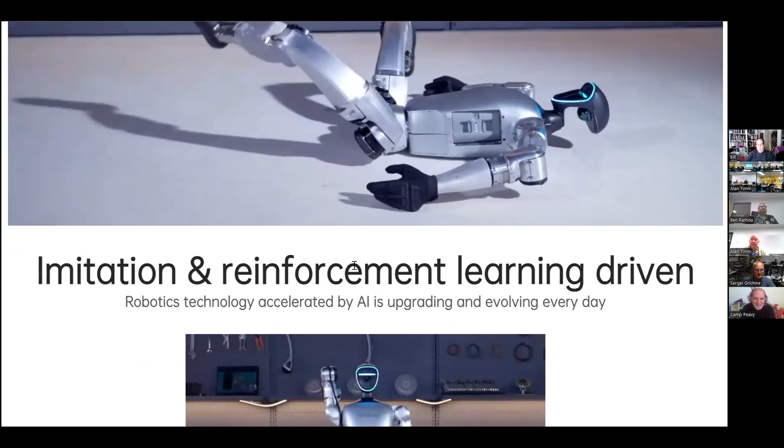So they did release in their video how it stands up. They couldn't copy the Boston Dynamics one exactly, but I'm almost certain it could get up in the same way.

As we scroll down, I just see that in the chat it says you need a humanoid to walk the dogs. They sell them as a pair.

How do you program it to do tasks? Like, what if you wanted it to clean the shower? Right, so that's the thing — the cheap $16,000 ones are probably going to be radio controlled. It can't do that, so it's not capable of general tasks.

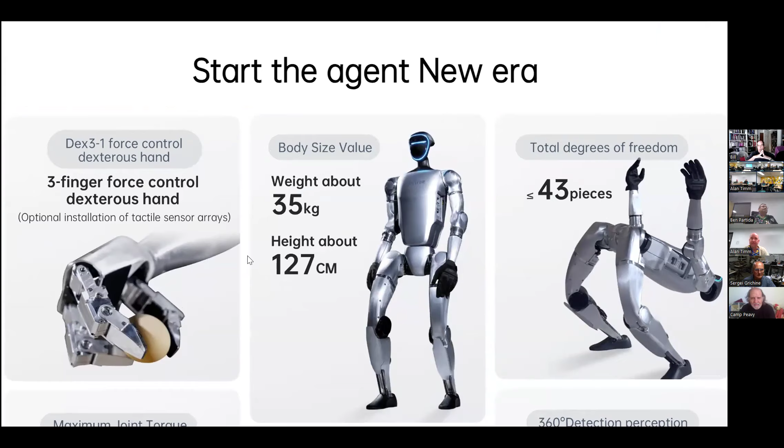And the breakthroughs required for more general tasks are still being made. We've seen hints of it with other humanoid robot videos, and that's exactly why there's 12 companies now spending tens of millions, hundreds of millions of dollars developing the hardware platform, because they believe the software is going to catch up. But that'll take time, as Chris Albertson likes to say — the software is the hard part, the hardware is the easier part.

Yeah, so they've got some video clips. They control the baton.

What is impressive about this isn't that it's twirling a baton by itself, but it gives you a little glimpse into what it takes to do this without falling over. Up until the reinforcement learning and Isaac Gym stuff, they would generally code an MPC controller just for the legs for locomotion, and then a separate controller for the arms.

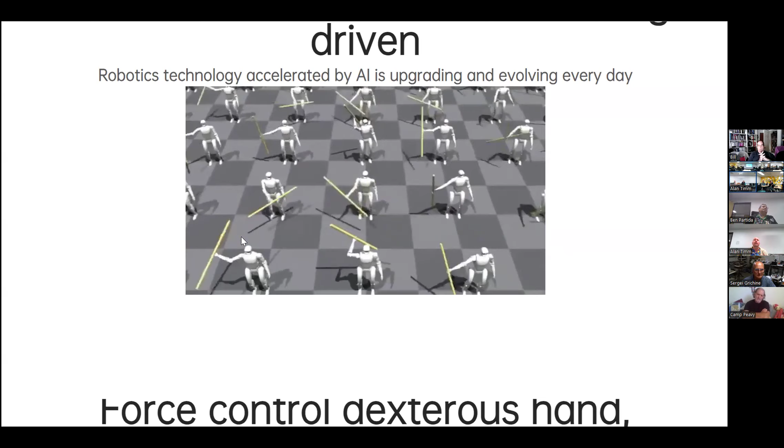Full body robot control, we knew was the next step. They knew it was the next step, but they didn't have a solution yet. So what you're seeing is not only that it can swing this baton around, but it is incorporating the full body dynamics that keeps it upright and keeps it in the same position. So there's a lot hidden in some of these videos.

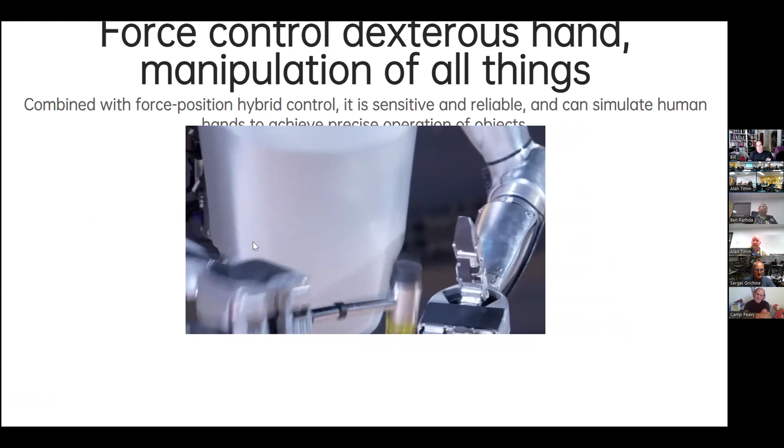So they have a quick demo, it's not even going to show you the full thing, of crushing nuts. I do not want it. That is not a task that I think is very...

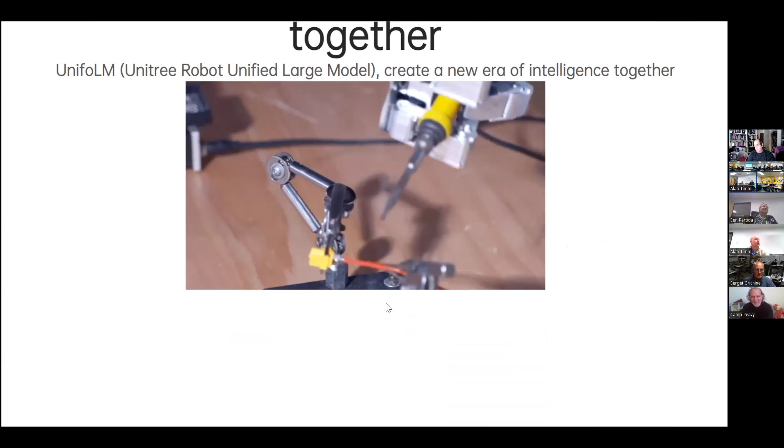Just like an engineer. And so here's what ticked me off about it: the $16,000 version of the robot has mannequin hands with gloves on it. The wrists rotate at the top, but there's no grippers. And I'm like, man, if I'm gonna dump 16 grand into a robot, I want fingers that work.

That started my every waking moment, after working on the weekend, task of recreating the hands that are 3D printable so that when I can buy this unaffordable robot, I can slap on my hand design and it'll work. So the last half of my talk, I'm going to show you some tricks and things that I did for those, and so far everything looks great. So that's where my adventure started - I wanted hands, and I didn't want to spend what we thought was maybe $40,000.

Switching over to the price sheet - certain qualified buyers were sent a pricing sheet for the robot. The information on the first tab is the same thing we saw on the website: 1 degree of freedom waist, 1 degree of freedom wrist up at the top of the forearm, no moving fingers. They call it a high performance 8-core CPU. It has to be using the same system module as in the Go2 - it's a Rockchip 3588P, or maybe it's an S - 8 gigs of RAM, 32 gigs of flash.

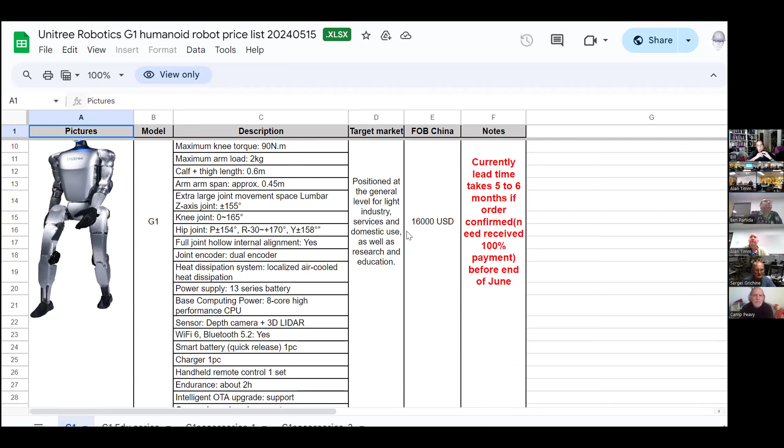The pricing list suggests that at time of ordering, you can mix and match the different features. It looks to me it would be possible to order, let's just say, the base model with the 2 degree of freedom wrist. That being said, the base model controller may or may not be able to control it. But once they're ordered, I don't think there's a way to upgrade the wrists or the waist to anything more.

But 10-year-old me, $16,000 robot, you don't need to eat.

So about the time they released it, they actually updated their GitHub site with the URDF and MuJoCo models of the G1, so this can be brought into Omniverse or the standard simulator, which name escapes me because I don't use it anymore - Gazebo.

This also put Mujoco on my radar. Mujoco, what are you using for a simulator these days, Alan?

So I am a big fan of Omniverse. The hardware requirements are a little bit higher, but I absolutely love it. It's a dream to work with. That's NVIDIA, right? And the environment is everything that Gazebo isn't. You can edit the robots through the UI, you don't have to edit a text file. And that's one of my biggest gripes about URDF and Gazebo is that they never made a GUI for editing.

and creating URDF robots. You always have to do them somewhere else or write them by hand. Omniverse, you can import from several different sources, articulate. But the one that Unitree uses, you're calling that URDF? Sorry, I'm getting too excited, I'm talking too fast, I'm catching up with your lingo there. I like it. Omniverse Isaac Sim is amazing to work with if you've got an RTX graphics card that supports it. The Unitree guys, and I could have sworn they were on stage with the NVIDIA presentation for Groot and NVIDIA Omniverse and Isaac Sim, but maybe they weren't.

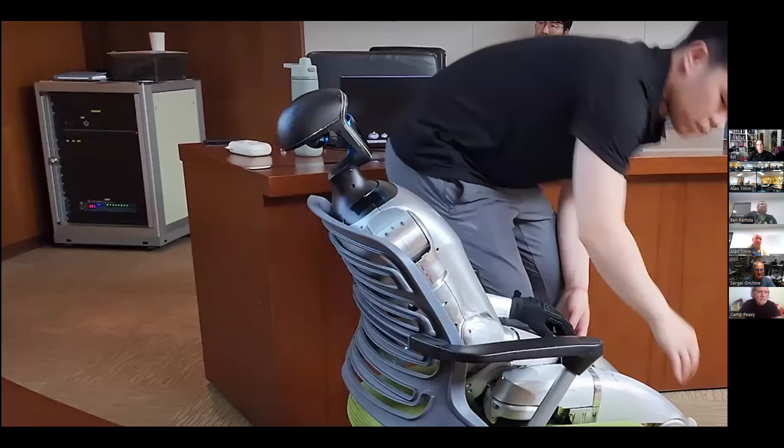No, we will not do that. I do not want that. I want this. There we go.

There's a company in Korea, a reseller, who has a prototype unit available that they're demoing to their board members. And so while this is running in the background, I wanted to talk about this robot and humanoid robots practically over the next 6 months to 2 years.

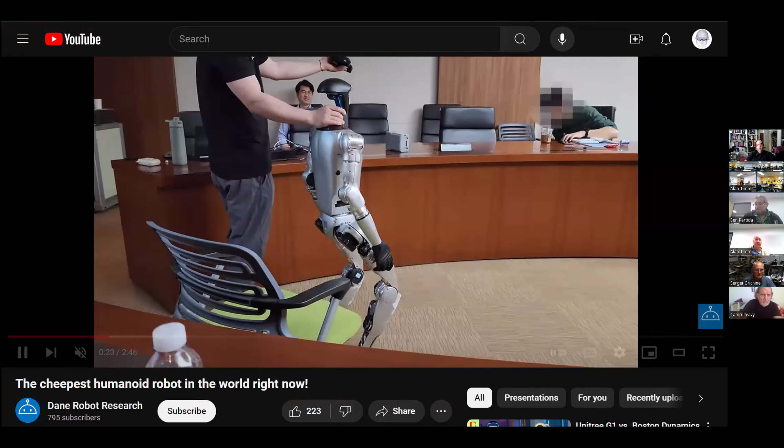One of the first things I wanted to talk about is let's table for the moment the fact that the software breakthroughs required for this to be truly multi-step learning aren't here yet, but are en route. So let's just assume the software is available. Okay, it's a stretch, I know, but I want to focus on the hardware. So you have force feedback, you have load feedback on each of the joints, 2-hour runtime.

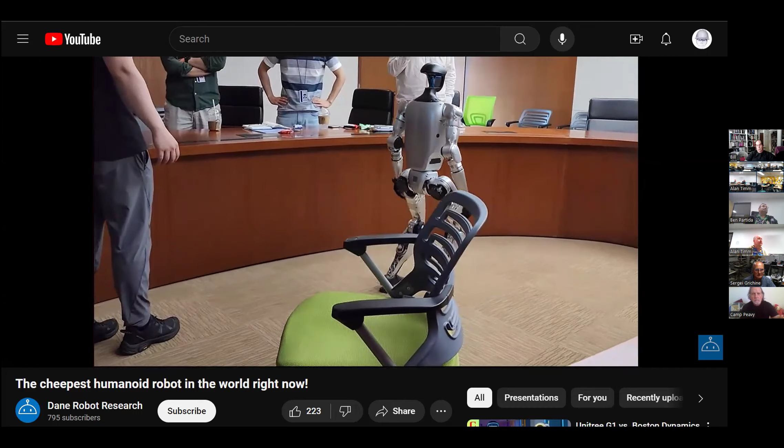One of the first things I want to talk about with you is, and you'll see this when you get up close and personal with my Go 2, is there are little scratches and discolorations all over it. It's hard plastic, it's metal, it's been operating in my house. And even with a skilled human pilot and the fact that it has obstacle avoidance and a LiDAR, it bumps into stuff. And when it bumps into stuff, it scratches itself, it scratches the other stuff, it scratches the walls. And at least with the quadruped, if something fails, it'll just drop down. If a humanoid robot fails, aside from the 'go crazy and grab a knife' type scenarios, it's just going to drop.

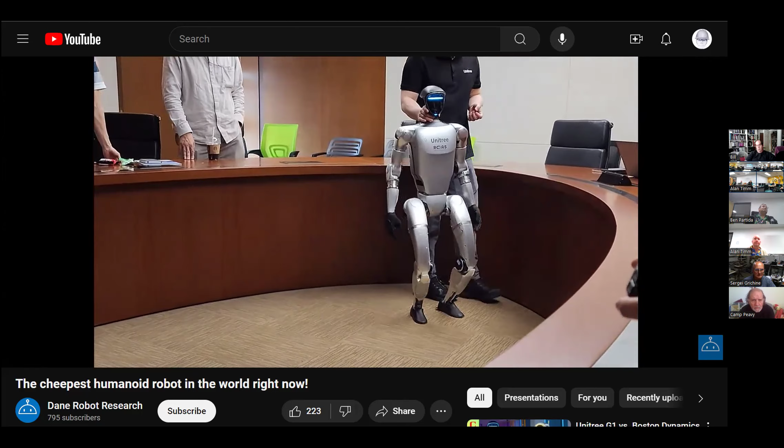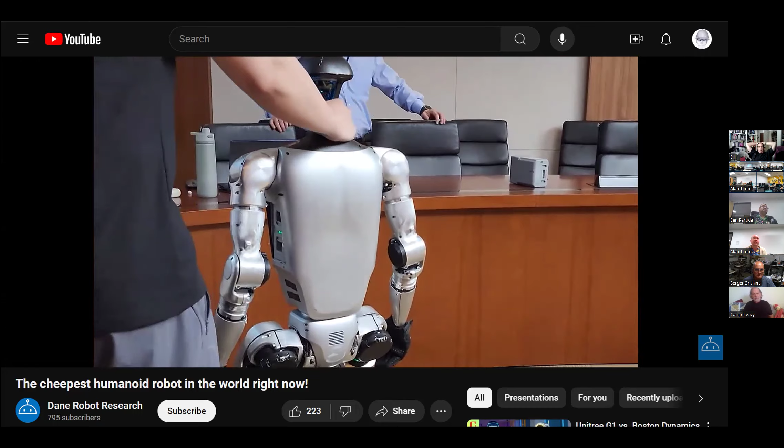And these are a lot heavier than my quadrupeds, I think 25 pounds. It's a hefty boy. This guy is 35 kilos. And so it's capable, you can lift it, but if something goes wrong in your house and environment with kids, pets, the penalty for failure is a little bit higher, which is something you're going to see with any of the humanoid robots, right? So my first point is piloting my Go 2 around my house, I still bump into stuff. What hope does the humanoid robot have to not bump into stuff when a skilled pilot still does it? So that's one thing to kind of think about as we move forward into our robot overlord future.

The second one is that this robot comes with a 9,000 milliamp hour battery that they're claiming has up to 2 hours of battery life between charges. All right, so you're not working in a factory, you're not doing a lot. That seems really, really, really short. And so I started digging into why that might be.

And looking at the video and taking the proportions, it looks exactly like the Go 2 battery that I have for the Go 2. Go and pass this around, please don't drop it if you can. So this is the Go 2 battery. This Go 2 battery is a 6,000 milliamp hour battery. Now they also have a high amperage version of it with 15,000 milliamp hours, the high capacity batteries that fit in the same envelope, right.

So my first thought was, why wouldn't they use the 15,000 milliamp battery? And secondly, if they're using the lower capacity battery, why wouldn't it just be the same capacity as the base model Go 2 at 6? This one's 9. It didn't make any sense. Are they different voltages, maybe? I think they're the same voltages, but we'll have to look that up.

And so naturally, I took my model of the Go-2 battery and I dragged it into the chest piece. My first thought was, oh look, the battery fits. I wonder if I can just buy one, just naive me. And then I started thinking about it.

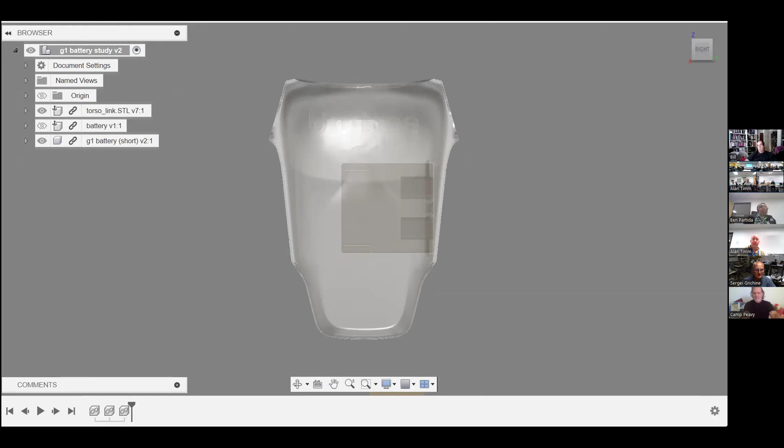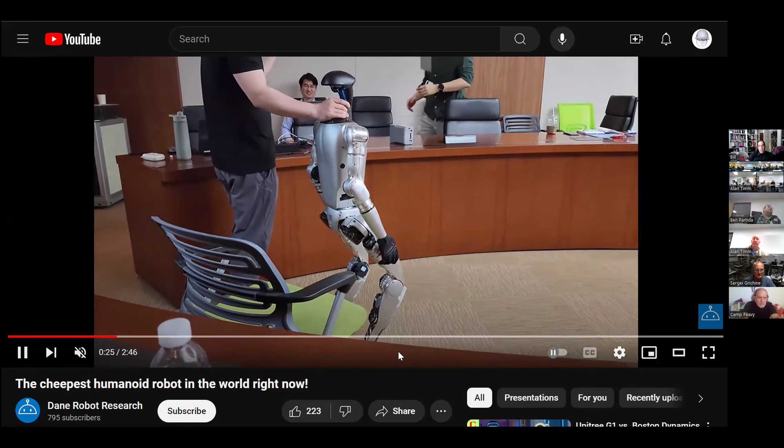Let's get back to this video for a second. Let me move this back over. In addition, I want to point out a few more things on the video, and you'll see this in almost every video of the G1 - notice how the tech, and it's the same technician, is always holding it by the neck.

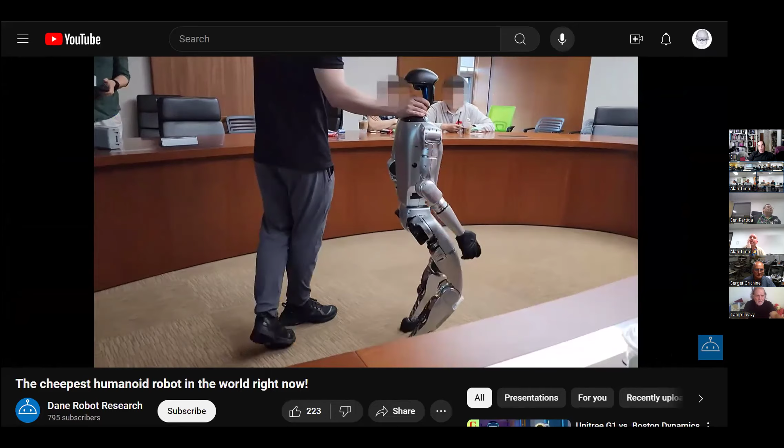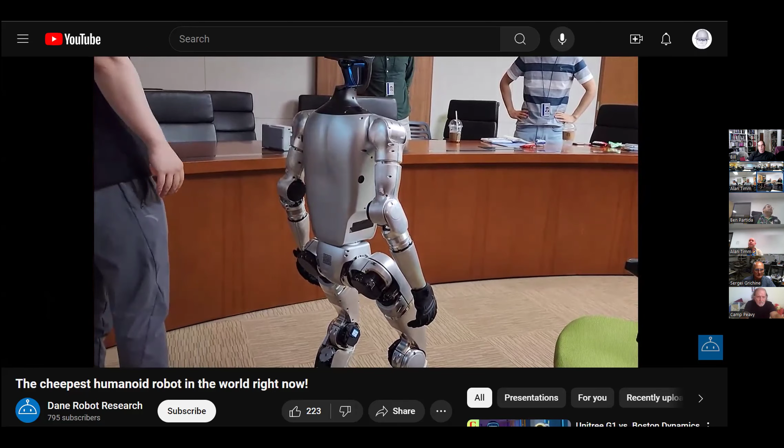Now they have demonstrated that you can kind of steer it, taking advantage of the balancing algorithm to move it around, but that's not why he's holding it. He's holding it because, if I were to guess, they've coded the walking program just like they did on the Go 2. It's not a reinforcement learning version yet, and it's not stable. There's a reason it's only been recently that we started building humanoids, and that's because until very recently there were no full body controllers - every programming method has always been static with code. It's just not quite ready yet.

But moving forward to when it's time to power it down, they do let it walk, like you saw there. Someone asked, how do they hand off of it, how do they know when to do it and when not to hold it? Well, the engineer was planning on holding it the whole time, and then someone in the room said, 'Can you please take your hand off the neck?' And he's like, 'Okay, but please move slowly.'

Well, this was a demo - yeah, you can hear it in the audio when you listen, it was in English too. So this is one of the things I wanted to get in front of you, and this applies to all humanoids, not just this one. So it's time to power it down.

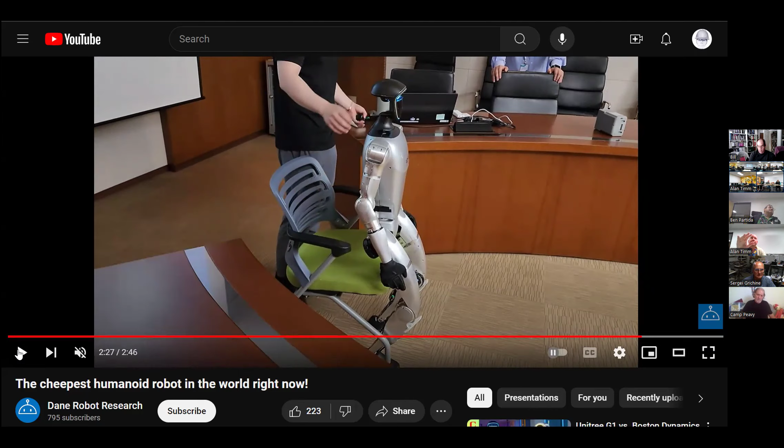So he kind of steers it in front of the chair and presses a button on the controller.

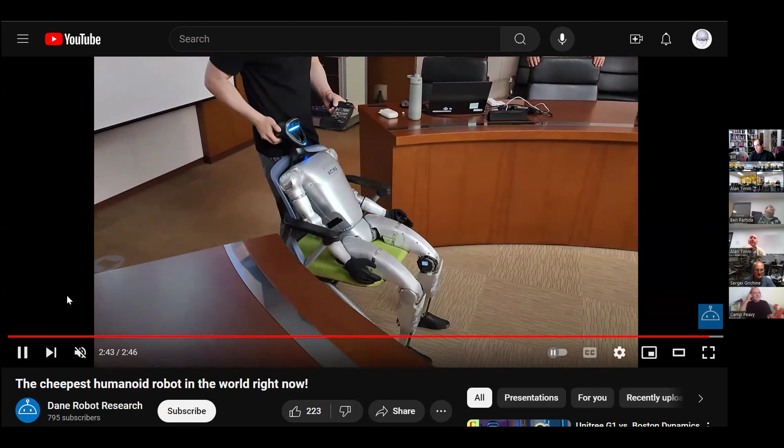A couple of things to point out here. Notice he's not trusting the chair to hold it up. That's because it's got a smooth bottom, and once it's powered down, there's no tension in any of the joints. So you're not really going to trust it to sit in a chair.

You could rely on the fact that the back of the head is shaped like a hook to maybe catch it, if you want to abuse the LiDAR back there for a little bit. And yeah, Bill, it is not yet dynamically stable. I want to get something in front of you as part of that in a few minutes.

What do you do with the robot when it's charging? Do you have it sit back down and lay down? Do you have like a murder scene in your home office every time you lay down? Do you fold it up? There's a standing holder, like a dock, a standing dock.

Yeah, and this is all of the robots. Maybe some of the other robots allow you to plug in to charge. You can have a noose, it seems like it could just fold around in some funky crouching position. We saw it get off the floor. Why couldn't it just kind of squat over?

Except that there's no hard locks on the joints, and there's no tension in the joints once it's powered down. So like in some of the movies, you'd see where when you lose power, it seems to settle into some kind of a rigid position. It's not there. The joints are just floppy. It goes full floppy aluminum robot.

So for all of these, do they stand 24/7? What do you do with them when they're charging or when they're powered down? Now, thinking ahead of this, because 10-year-old me is screaming for it, like, what if you designed and built a wall-mounted thing with a little cubby hole that could capture it with a slight upturn, maybe 6 inches lower from the standing height.

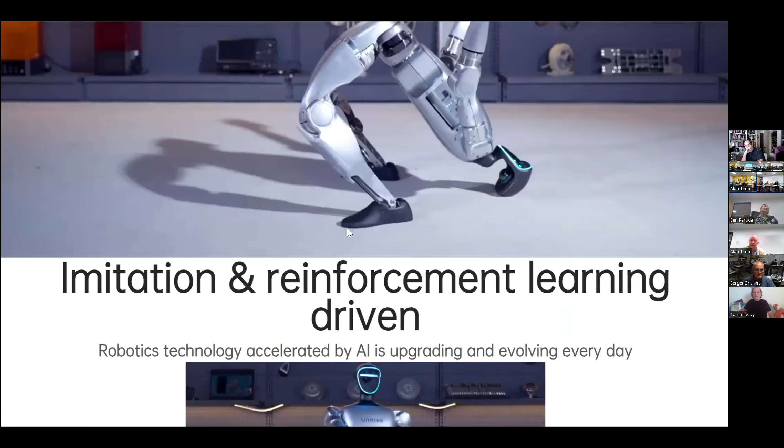Well, like that other robot, the new Atlas Electric, whatever, how it folds up onto the bench, really tight. Something like that folds up and the person picks it up like a piece of luggage. Why can't this one do that? And then maybe there's like, also there could be a mechanical lock to hold the legs together, just a mechanical lever or a thing so that it won't come apart, you know?

I think I'd hang him on the wall, put like a hook on the back. That way he's carrying it, but maybe it's on, so that's why its joints are stiff, because it's turned on, currently energized. In the video, there's the position where it folds itself into this ball, and then the engineer picks it up to demonstrate that it's not too heavy to pick up, but it's still powered on.

So anyway, it's something to think about. What do you do with your robot when it's charging? My guess is it's going to be some type of wall mount scenario, so that they don't have to fall down and lay on the ground. I think you're right, the wall, they'll take up space that way too. Standing is kind of the best way. You could go lie in a bed, like humans get a bed, but that takes up room.

We need two robots now. The other one's charging, right? Why buy one when you can buy two at twice the price? You guys are so supportive, I appreciate you.

I think like the cubby hole, just like in Denzel Washington's old movie, the robots are in like a cubby and it's supported in there. So you need a special closet. Put them in the closet.

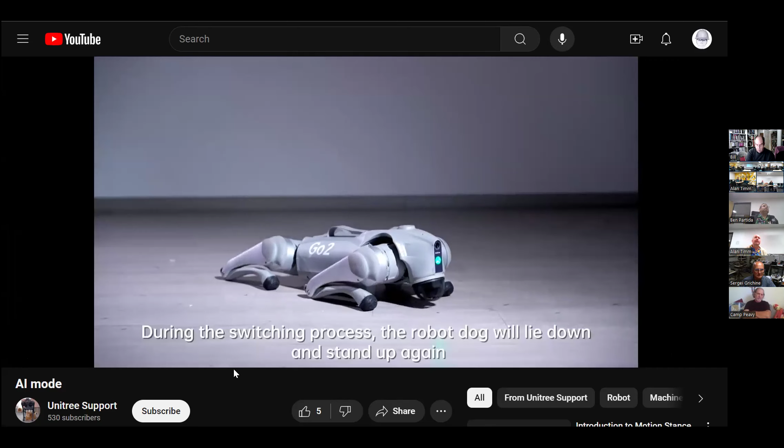But I guess we're doing this backwards. During the show and tell, you'll get a firsthand view of Stompy. In AI mode, the walking and the movement is smooth, and its recovery from disturbances is smooth.

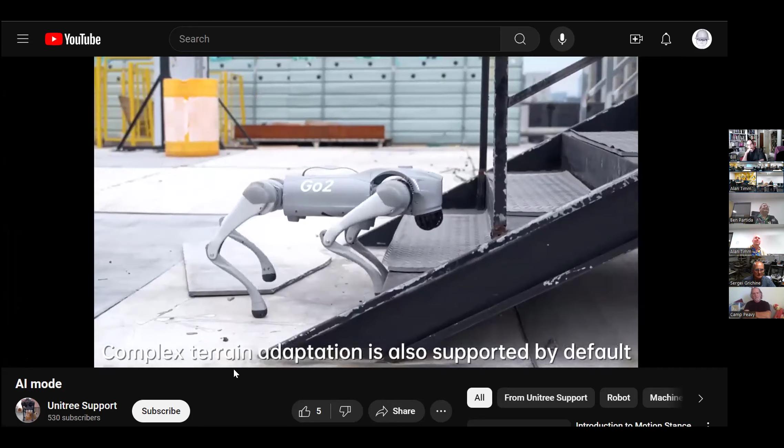So there's no doubt they're going to be doing something similar on their G1. But in order to do something like that, mine doesn't do it like that. Mine, you knock it over, it notices it's knocked over, and then it has a hard-coded stand-up routine.

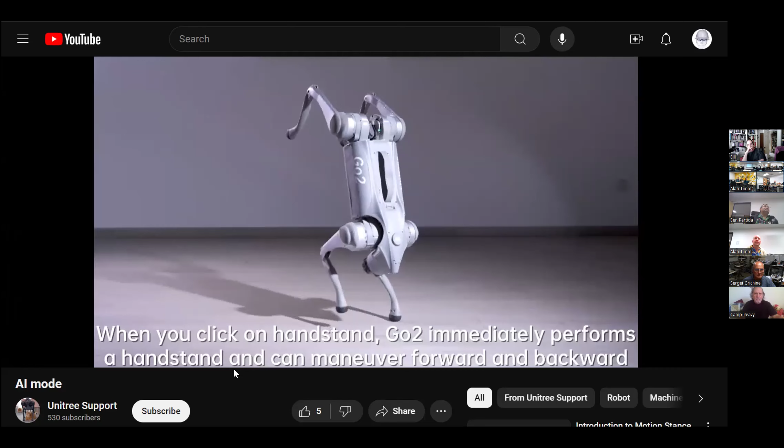This is the mode that supports the handstand that they teased in the first promotional video last year. So Unitree is working on it. I expect to see something similar if they can get the full body reinforcement learning model to run on the NPU, so it might be able to do a few more things. But really, I think that's going to be limited, and you'll need a fully Orin level or next generation after that to do the truly useful general purpose, teach-it-a-new-task robustness stuff.

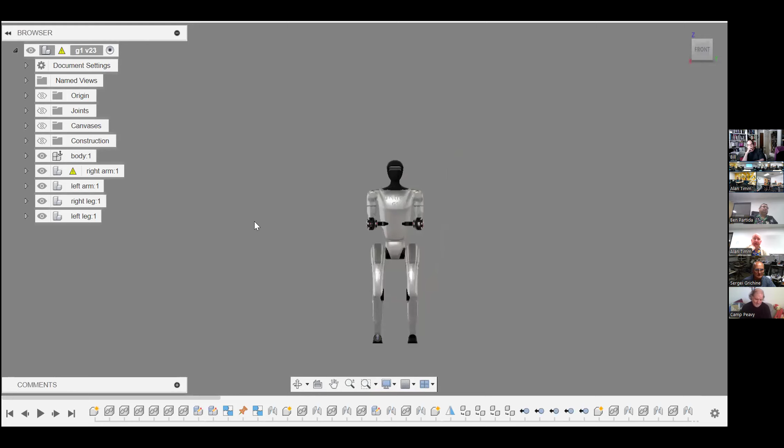What I wanted to chat with you about is, naturally I brought the STL files into Fusion to take a look. This version has my hands and forearms on it. Just to give you an idea of scale, here's a person. The robot itself is only 4 foot or 4'2", depending on how high it stands, so it is small.

The hands are oversized for its body, so it will be limited in terms of the things it can do. It'll be challenging to reach on the countertops, and it can't reach very high in the refrigerator. So it is going to be limited by its height, which is another reason why it's only 16 grand.

But what I wanted to chat with you guys about is looking forward, assuming the hardware and software are able to keep up, what things would this hardware platform be capable of? Right now, I'm just thinking of the simplest stuff, like a shake hand that really shakes your hand, or a high five.

Should it be able to walk upstairs with a handrail? Yeah, it should be able to do that. Can it open doors? With the articulated hands, it should be able to grasp and twist doorknobs and door handles. So the promise for humanoid robots is to be useful.

So having a 4'2" robot in your house, everything that I can think of is limited to the same things that you'd ask a 6-year-old to do. But looking at the hardware alone, you have the trite, get me a beer. Can it open up a refrigerator door? Probably. Can it grab something off of one of the lower shelves? Absolutely. So the get me a drink, get me a beer contest, the hardware should be capable of that.

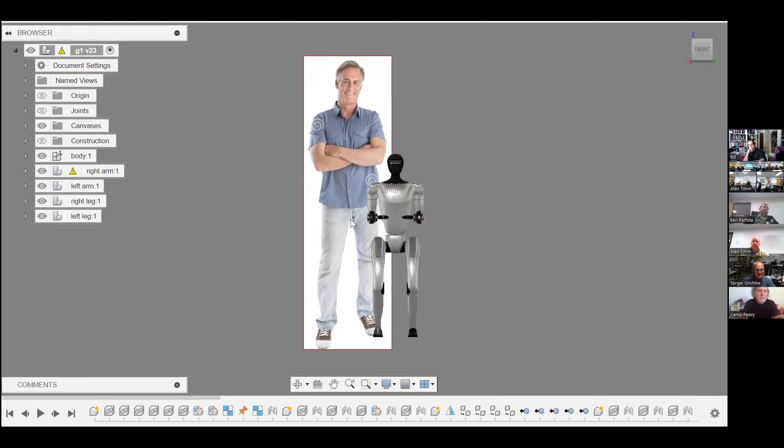Here, let's get rid of our stand-in here. So it has 3-finger hands, the thumb pivots. There's load sensing for the motors. You have a rough idea. Those are your hand designs? Yeah, we're going to talk about that in a few minutes. So I have a rough approximation of force by virtue of load. It can't tell if there's a light touch, but the motor controller I'm planning, the motion flow I'm planning for it, you can express in terms of speed, velocity, position, and load limit.

So looking around your house, if you had a 4-foot tall, 4'2" humanoid in your house, what else do you think the hardware would be capable of doing? If it's useful, great. If it's fun... I don't know if the legs are strong enough to crouch down so it can reach the ground. I'm hoping that it does. Picking stuff off the floor, picking up after your kids, tidying up toys.

Hey, take these glasses into the kitchen. I think it can reach and put it on a counter, but it's not tall enough to set it in the sink, and I don't think you want things dropped into the sink. Set things into the dishwasher. It should be able to open the dishwasher door.

Are the arms long enough with the legs set up that they are to be able to maintain balance and to reach into a front-loading washer and dryer?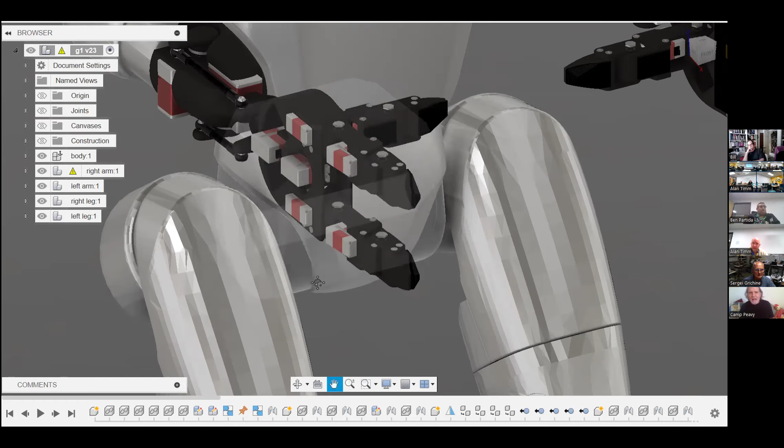Maybe. Tim, when I think about mobile robots in the home, I think of the big 3 jobs: food, clothes, and trash. And we got dishwashers for washing dishes. We've got washing machines for washing the clothes. We've got trash compactors for garbage. But what is lacking is moving the dishes from the table to the dishwasher, to the cupboard, to the table.

Your clothes from the hamper to the washer, folded, and put into closets. And then the trash cans need to be aggregated, the day of garbage night and put into the trash can, moved to the curb, and then after it's picked up, brought back to wherever the trash is located. But it's the logistical things. And with a humanoid, I think we're on the same page here. The end game is the humanoid form factor, because you're building a device that can navigate within your world and use your tools and that kind of thing.

Yeah, let's start walking through those. So I am the designated take the trash cans out to the curb and take them back every week at my house. This robot, this size, with this amount of strength, I don't think is capable of doing that. So this robot won't be able to take the trash cans out.

Taking the trash bag out of the kitchen trash, it should be able to do that as long as it's not too heavy, and if you don't have a roommate like mine, which stuffs everything down for the sake of efficiency.

Folding clothes, I specifically updated the geometry in my version of the hands so that the thumb can pinch to a point with the front or the rear finger. So I can pinch, or the hand can pinch. So it should be able to fold clothes.

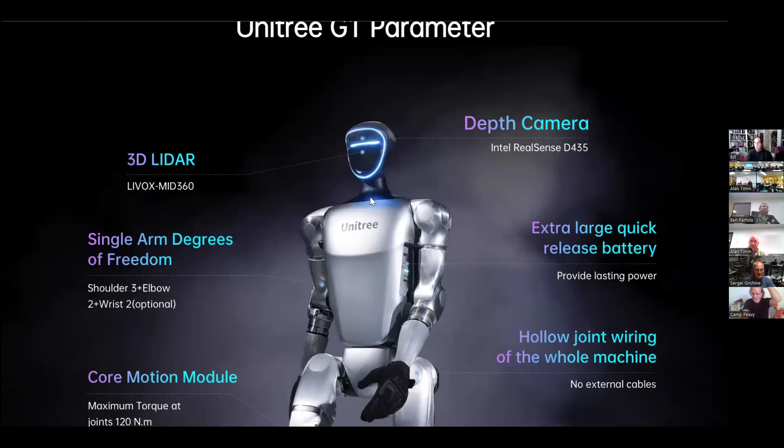Let's take a look at the sheet. What's the next spec, 3 kilograms, which is like a little under 7 pounds. I was thinking that's like walking a small dog, or maybe feeding the cat. Where did we see it, 3.2 kilograms? I think it was on the pricing sheet. Maximum arm load, 2 kilograms. I'm going to assume that's combined, so 1 kilogram each arm, but I don't know that for sure. That's pretty light, not much. But if they unlock additional force, it's 3 kilograms, so maybe they do mean 3 kilograms per arm.

So Brian, to your point, my Alfie and the humanoids are both waiting for the same future series of software breakthroughs to make this possible. So about the same time that my Alfie can do this stuff, these guys will as well. I'm going to put Alfie back together, and he's going to join the stable of robots once I finish the hand and the forearm.

Is Alfie your InMoov? No, Alfie is my Aloha Mobile build, on the Aloha platform. Let me see if I can bring him up without crashing Fusion before I switch over. No, maybe not. So yeah, he's a low-cost, short robot that I built. Yeah, I've seen that one, we talked about him during ROS. Yeah, that one, my ROS bot.

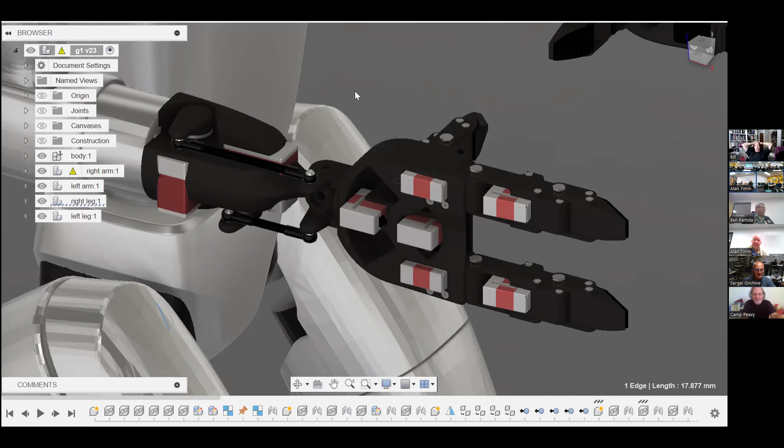Let's turn our attention to the current focus of my OCD, and that is the hands.

Let me go ahead and switch this over. Actually, I could just open it up this way. The white and red parts are the little servos, the bus servos. Let me go ahead and open this up.

All right, so my hand design is about 80% complete. In the interest of time, I also modeled the original G1 hands, and I'll show you how I got the proportions, it's a really fun technique to do. There's a menu off screen, sorry.

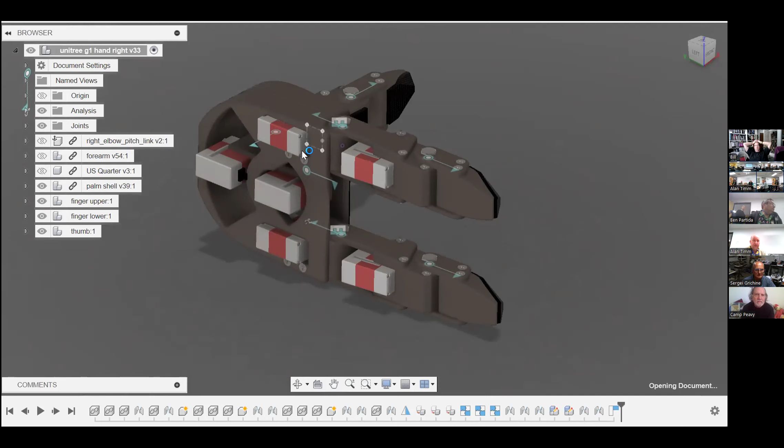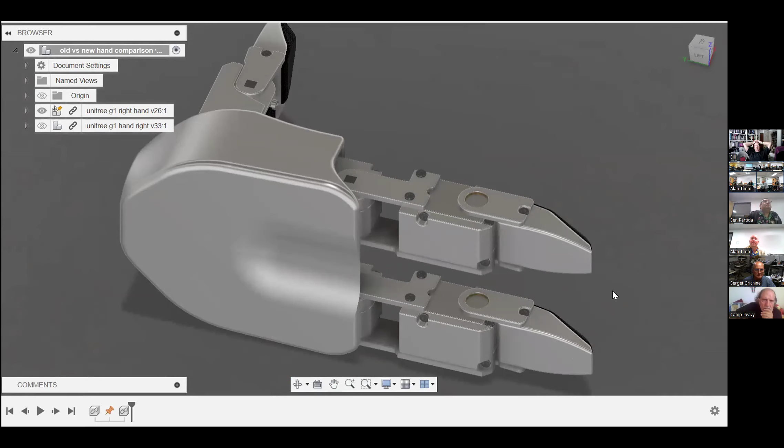So here's the OG hand, here's what I wanted to show you, an old versus new hand comparison. After spending a couple of weeks painstakingly recreating the factory G1 hand, which is all CNC milled custom parts, you can buy one of these hands for your own robot for $5,000 each. When I started pricing out options like Proto Labs to get the components milled at even medium production quantities, it kind of makes sense, it's just expensive.

Now, in order to do this, I used a couple of neat techniques that might come in handy on your Fusion journey. They also recently changed the name of Fusion 360 to Autodesk Fusion, in case you missed that. Here's what I did to get accurate versions of the parts.

I'm not working offline. You're offline. What's going on?

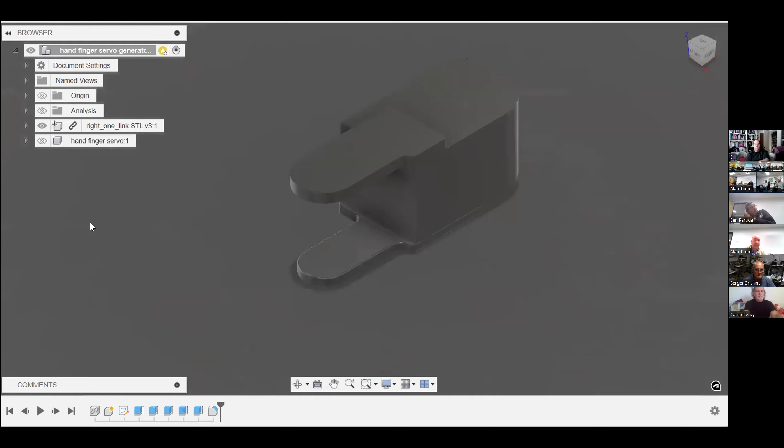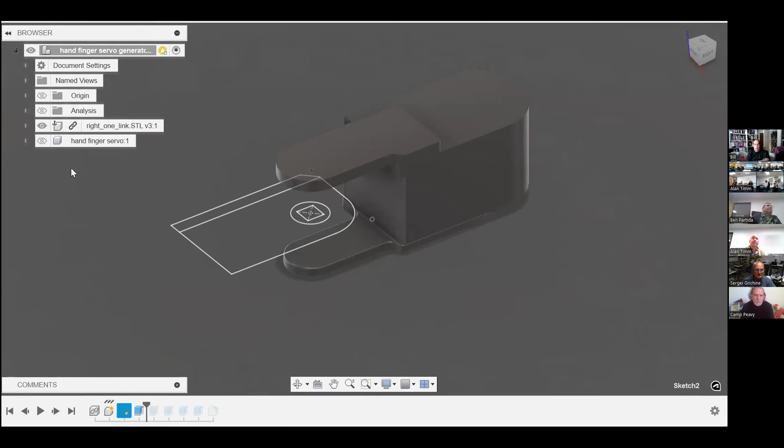So how I do that is I create a new project, then import the STL, which you get as part of the URDF simulation file, as reference. That's imported. You can't select any of the facets, it's not good for anything, but you can use that to create drawings. I've already moved everything over, so it doesn't line up anymore. You create drawings, and then recreate that component using the drawings you drew as reference.

That's exactly what I did. After that, because the URDF STL files are very simple, I looked at the videos and photos to create additional detail based on what they suggested. Once that's done, you can export the part, and it's available to do other stuff. That's exactly how I recreated from scratch every one of these parts, including the palm.

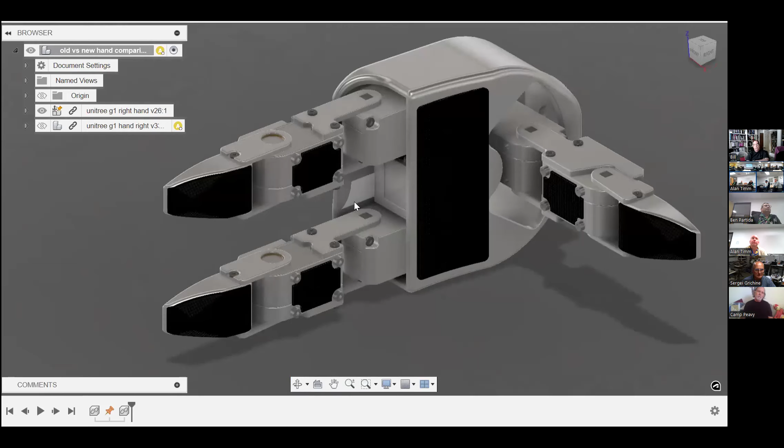I had this for a little while, so I was able to study it. It's fully jointed and articulated. Then I set about creating my version, not having these super slick, super small serial bus servos. These are 100% custom. I scoured AliExpress and Alibaba—no one else in the world has them, so you've got to figure out something different.

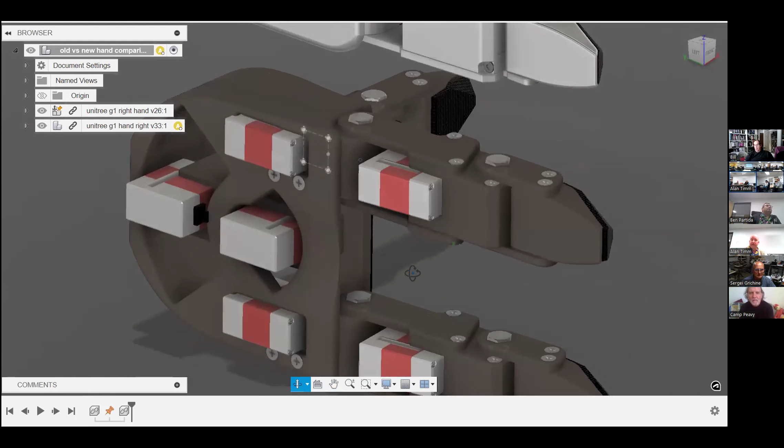So what I did was find the smallest metal gear serial bus servos I could find. These are the SCS 2332s. They're amazing, but they don't fit into the same envelope, so I had to figure something out. What I figured out was that if I ordered some... well, I've got to drill down a little bit.

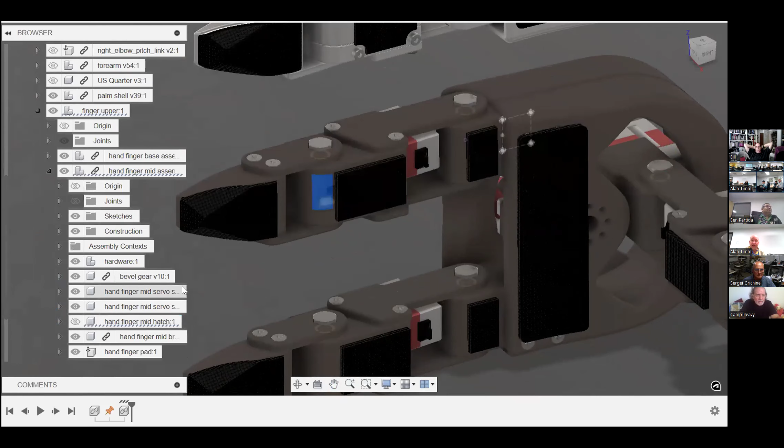I'm looking for this: if I ordered some 90-degree bevel gears from AliExpress—those are the gold things—this is super exciting because ever since I was a kid I'd get Boston Gear catalogs and think, oh my gosh, you can buy a machine gear for $40 or $20. These are $3.50 a pair. So I ordered a whole bunch from AliExpress, and they got here in a week and a half.

That allowed me to take the rotational force required for the finger and move it off to the side. Then I can tilt the servo 5 degrees so the tab sits within the envelope of the existing servo. If I extend this by 4 millimeters and that by 2, everything fits. My brackets are also a little thicker—I'm using a carbon fiber infused PETG.

Check this out—I want to pass out two things. This is a 3mm bracket; these haven't been cleaned up or sanded down yet, straight off the printer. But check out how stiff it is. I found that with a 3mm thick bracket, it's stiff enough for me to trust in a robot that has to do stuff and bump into things.

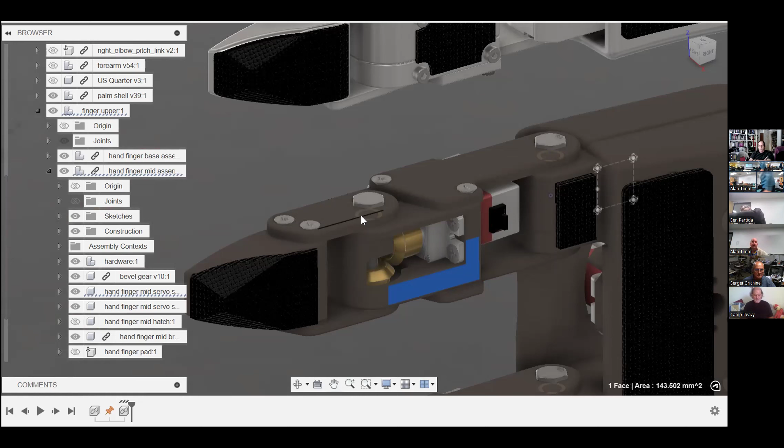Oh, here, let's go ahead and take this off—take the cover off, and this has the... pass it around. Wow, so you've got this whole thing. This is great, so I've got a good design. I've modified it for the required geometry to take advantage of the materials, so some things are a little thicker.

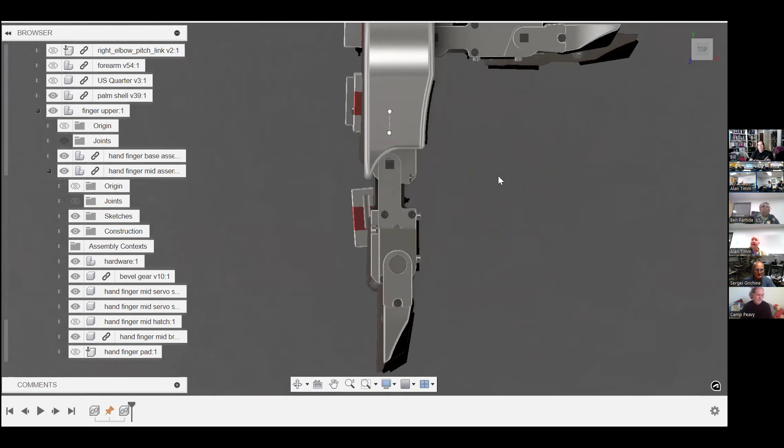When you compare the original to my version, just in profile, it's almost exactly the same. But you said you offset the thumb so the fingers can pinch. Yeah, I gave it a wider swing so they can pinch. It took me a minute to figure out why you'd even have this joint, and then I realized—oh, so it can pinch stuff.

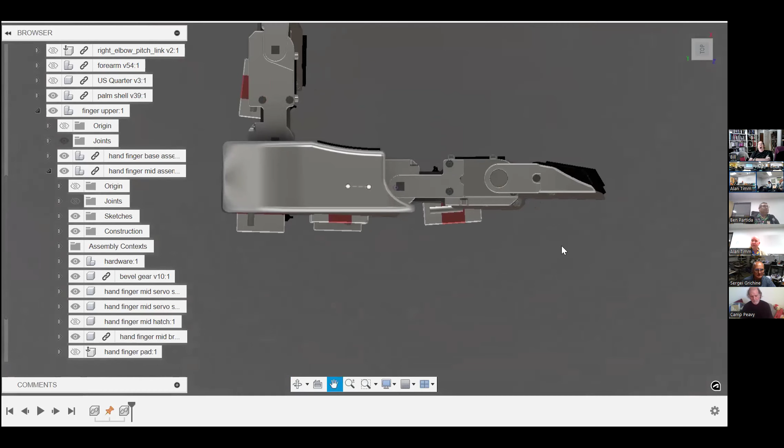My version of the hand is only 4mm longer. And it looks like a lot here, but remember, it's very, very small. And because I'm reusing the same parts files for the thumb, it is about a centimeter longer, but I can't think of a reason to keep it short.

It's all the same parts, so I've got almost the same design. It can grasp stuff. I even bought 2mm silicone adhesive sheets that I can cut to shape.

I'm going to take each one of these pads and create a Fusion cutout, like on a little sheet, so I can set it on the silicone and then just cut out the exact shape I need, so it'll be grippy.

I was trying so hard to have the hand and the palm finished to show you a completed hand, but it just wasn't in the cards. And I'm like, wait a minute, this is supposed to be fun. Why am I rushing to get this done?

Yeah, so these are prototypes. It doesn't really fit, but again, the material is super fun to work with. Something of this size can take a spill and a fall without breaking and deforming, which is something else to consider for a humanoid robot.

It's gonna fall, it's gonna do something dumb. So it's an amazing material.

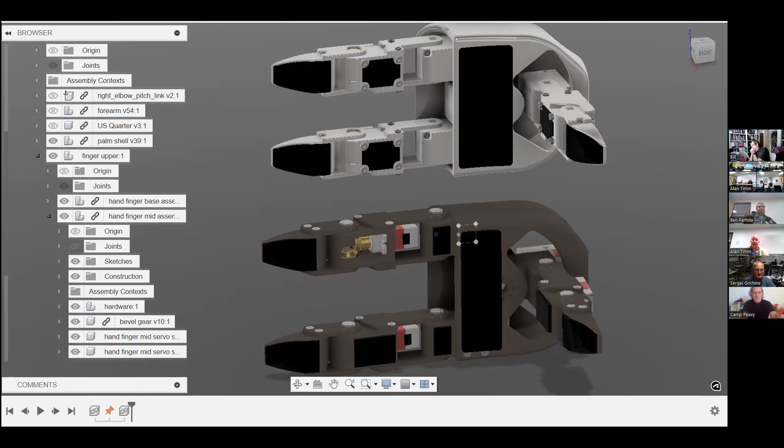Over the next couple of weeks, I should have the hand design finished. And I've also started working on the 2 degree of freedom forearm that allows it to twist in 2 dimensions. With the twist at the base, it'll be a 3 degree of freedom wrist.

So this one's about 40% done. I'm working on clearances and attachment points right now. The servos have been ordered, of course.

So at the end of this exercise, minus whatever is required to get it to interface with the base of the forearm, which I just don't know, I will have designed and constructed a replacement 3 degree of freedom wrist and 7 degree of freedom hand that'll be a direct upgrade and replacement for the $16,000 robot that I can't afford and doesn't do anything.

And the $5,000. So this whole thing, they want $2,500 for the 2 degree of freedom wrist and $5,000 for each hand. So you're looking at $7,500. You're saving $15,000. And the bill of materials for this whole thing should be less than $400.

Yeah, these are $20 each.

Could this be used on your Alfie robot? This is too big for my Alfie, but on any similar sized robot, you'd be welcome to use the design.

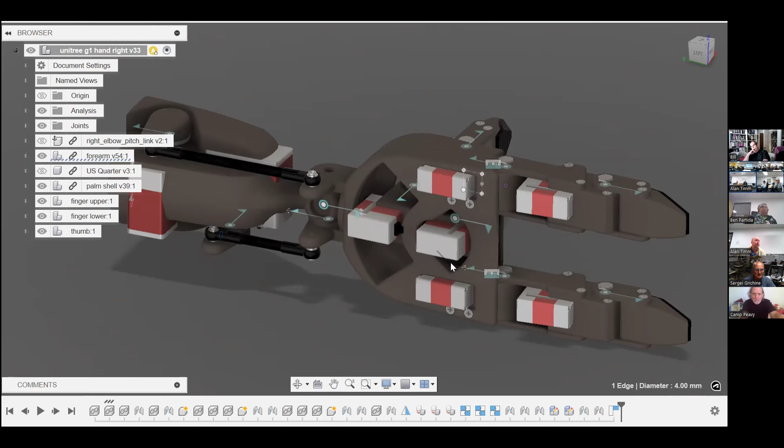Hey, those little push rods, they look like they might be taking a lot of weight. Are you going to make those out of aluminum? They're aluminum ends, and I think they're steel, but yeah, everything here is very small. I don't expect that to be an issue—the servos weigh far more than the rest of the assembly.

The push rods are parts that you can buy then? Yeah, the push rods, and there's threaded rod underneath so you can adjust the length. You can get it from Amazon, or if you want to save a few bucks, AliExpress. Just like RC cars have these tie rods—that's exactly what these are for.

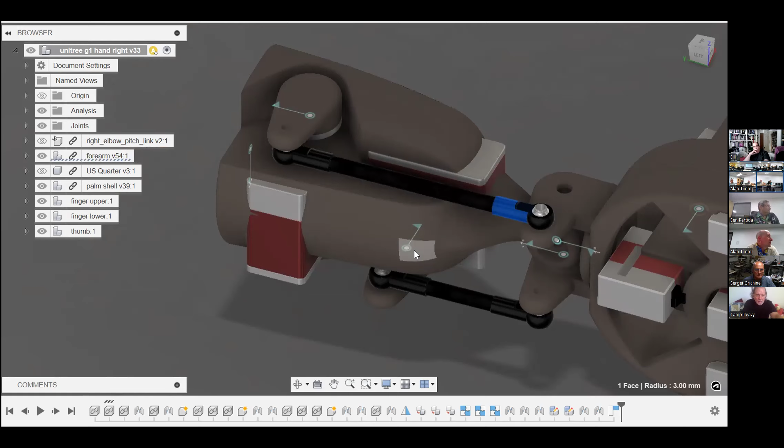So probably about 2 weeks to finish the hand design, and then about 2 weeks to finish this. The servos should come in next week. It's been a lot of fun. I don't want to say I'm obsessing over it, but...

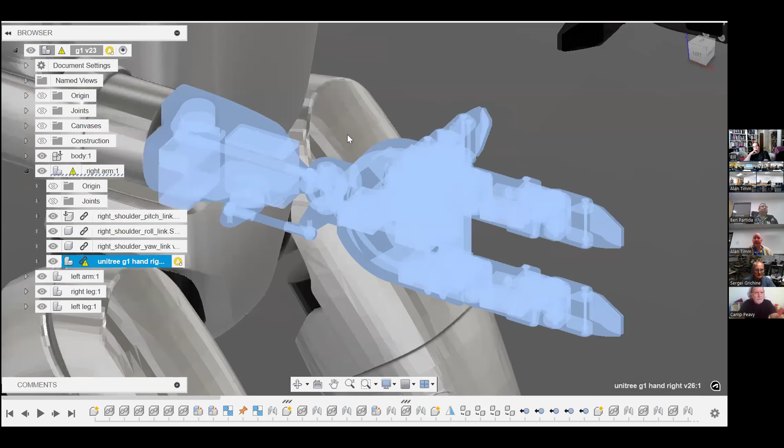I learned a lot more about Fusion and multi-part design. Getting back to the G1, now I've got to decide if this design aesthetic fits in with the rest of the robot, or if I want to update the design to include a vented cover out of carbon fiber PETG to kind of hide it. I'll probably doodle it this weekend to see if I think it looks better or not. But yeah, the hand's performant, it's strong.

I want to ask kind of a crazy question. The hands have certain lengths, and when the robot moves its arm, does it have to know how far? Is it going to bash into stuff if the hands are too long? You see what I'm saying?

Yeah, the motion planner needs to, in order to be successful, programming this traditionally. Now, reinforcement learning is a whole different ballgame, right? But if you were to program a motion controller for your hand in your robot, you actually need to run a little simulator that is aware of the joint's position and location, as well as the joint position location of known objects, integrate LiDAR. Yeah, that's right. That's something that you would definitely need to code for.

So you were going to do that in that, whatever that Omniverse or whatever that. Yeah. And then under reinforcement learning, I don't even understand, like I understand how it works, but as they find more tasks I expect that's just handled as part of the reinforcement learning motion planner, but I'm excited to see. Short answer long, if you're not careful and you're not paying attention to your surroundings, it's very easy to bump into stuff.

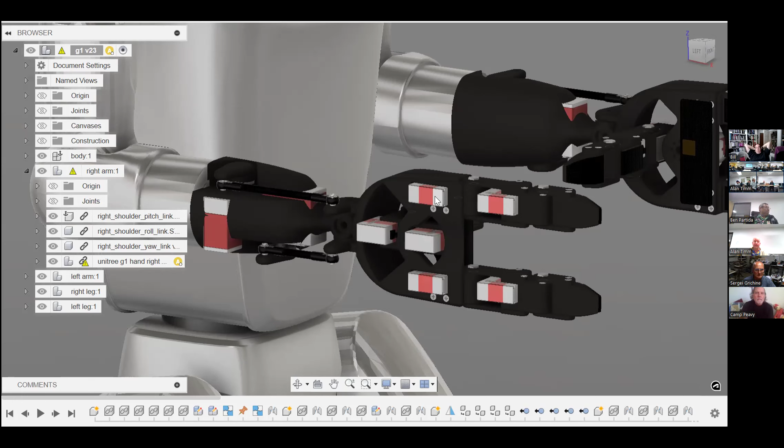Yeah, using a laser with its receiver and modulation. Yeah, it's funny you mention that because that's exactly what it does.

It uses the front one - uses an Intel RealSense with structured light, but in the head it has Livox. I don't know why they didn't use their own. And it's actually laser time of flight. There's one motor that keeps it spinning this way and another motor that keeps it spinning this way, so it actually maps time of flight and laser the entire room.

But at the end of your finger, it's about the size of a nail. As you approach the object, it'll indicate there's an object there. Oh yeah, Ben actually gave me a little tiny board time of flight sensor. So yeah, if you included those on the fingertips, it would give you some additional input as you approach objects or obstacles.

Yeah, I was going to ask, what were the original weight of the hands, like the ones that cost that? I don't know if they provided that. Let me take a look.

One reason why I asked is, let's say you do proceed to get the $16,000 model. How would balance play a factor? Because I'm assuming these are being much lighter in the middle hands. I just don't know what balance would be.

Yeah, that's a really good point. Could you slap on my hands on the 16,000 and still have it perform? I think the cheater answer to that is no, but only because the cheapest version is radio controlled and didn't come with articulated hands. And I don't think that their radio control would support that because it wasn't available. But this is a lot of guesswork, right?

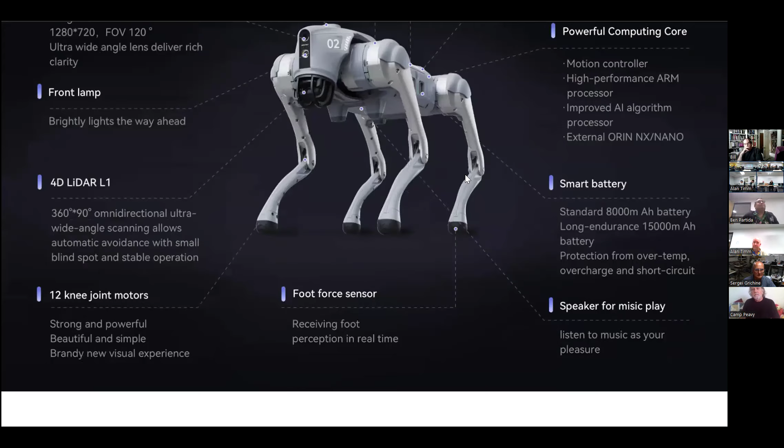$20. Those are nice servos, my servos are like $3, my micro servos. Can they break? Yeah, these are... the ones in the hand are $20, and first person someone says, yeah, they're... oh, it's $2,800. I thought I saw something for 16. Oh, that's the Go2 Pro, that's the one that they want you to buy.

Okay, there we go. But yeah, the Pro, you think might have an arm? The Pro capable doesn't have it. I don't even know if the Air supports the arm, but let's see if we can find it. Unitree Go2 arm. I mean, he could, that would be able to walk over rough ground and upstairs, you know, and it could go look at things. You can send it out, you hear a noise out in your yard, he would walk out in your yard and look around.

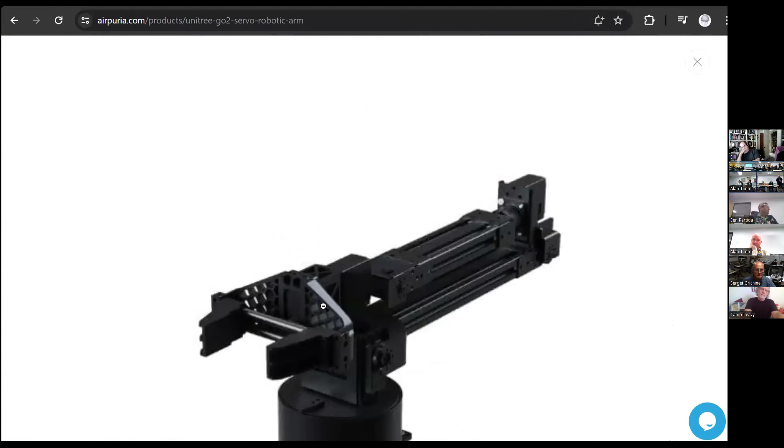Here we go. Not a he though. I said it, oh there we have something, $4,900. Yeah, that seems a bit much, it does. But yeah, it does do something. There, it's got two fingers that pinches something. I can see it unfolds, right? Yeah, yeah, it's kind of like a scorpion arm or something. That looks awesome. It could theoretically take a door handle and open it, in theory, yeah, it should be strong enough. Yeah, and there's a rotate, yeah, that does look cool. Oh, I wonder if there's a picture of it on the dog, let's see.

There we go, now we got a dog with rapid eyes. Yeah, so it's got the Livox 3D LiDAR in addition to the one down here. It's got the 100 teraops Orin backpack, and then it's bolted.

That looks like the Boston Dynamics dog. Yeah, the only thing, and I like the Boston one better, is on that one the arm looks like a head, or the hand looks like a head.

I tried to write a use case for the company I use. They came over and I said, okay, here's what we can use it for. It's $100,000, by the way, that's how much that thing costs, but it didn't get approved, so we didn't get it.

Show them the body with the covering. They got a soft body for it. Oh, I didn't know you could put a costume on it. Well, there we go, now let's save it.

This is an amazing use of the hardware platform. I don't know how it's going to stay cool because those motors need circulating air. So, by the way, those arms, when they pinch together, you lose your finger in that.

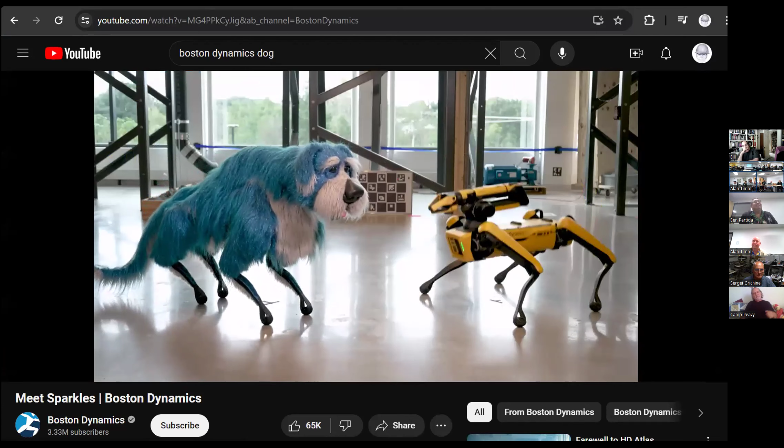You know, they gave a big long training session. You can't, you got to keep your hands off. See if I can, they look friendly right there, but they actually have pinch points for humans. Yes, and when you get up close, you'll see that they have hands away from... there we go, that right there.

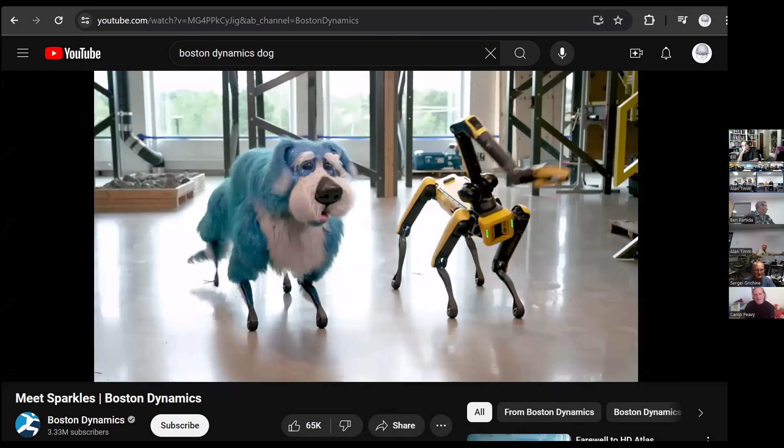So yeah, that's all I've got for this month. It's been a lot of fun, and I'm hoping I can finish off the hand project so I can get back to putting Alfie back together.

Oh, your 3D renditions and 360 fusion, you're so far ahead of me. Being able to rotate around and look at that is really awesome. Do you have any intermediate use cases? Like if you have a wrist and a hand, now you can do pick and place or do something. Are you going to try something before you go full robot on it?

I might. My first vision was I would just set it up because I do want to play with control and I need to see it move. Sure, right? But then I don't have anything robust enough to attach it to really.

You have the dog. This is his excuse to buy the robot. Yeah, they already have the hand.

Yeah, I am personally trying to trick myself with the slippery slope. How else, the sunk cost fallacy. How else would you test the hands if you don't have the body to go with it? Yeah, because I do want to test load feedback and stuff, an actual manipulation test.

Do those servos have load feedback? Those $20 servos? They're in the hands. They have which, load feedback? Yeah, position, velocity, acceleration, and load.

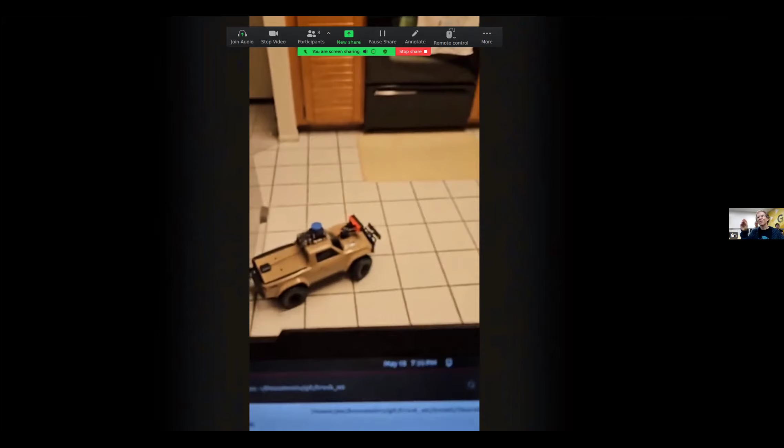This is a culmination of that work—you can see it. That's the first stopping point. It navigates through doorways a little tightly because I had to change the padding, or inflation layer, which pads around the wall. In a house like this where things are tight, you've got to reduce the inflation layer so it can reasonably get around. Because in ROS, if the robot gets stuck in that padded area between the wall and where it thinks the inflation is, it will stop moving even though it could. It just thinks it can't. So I had to reduce that, sort of through trial and error.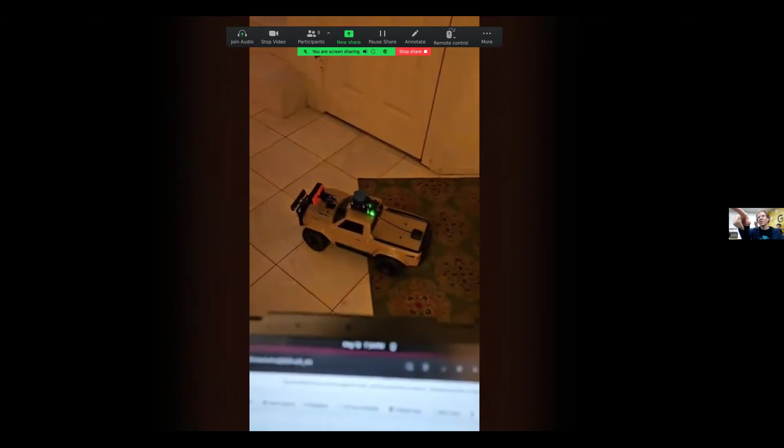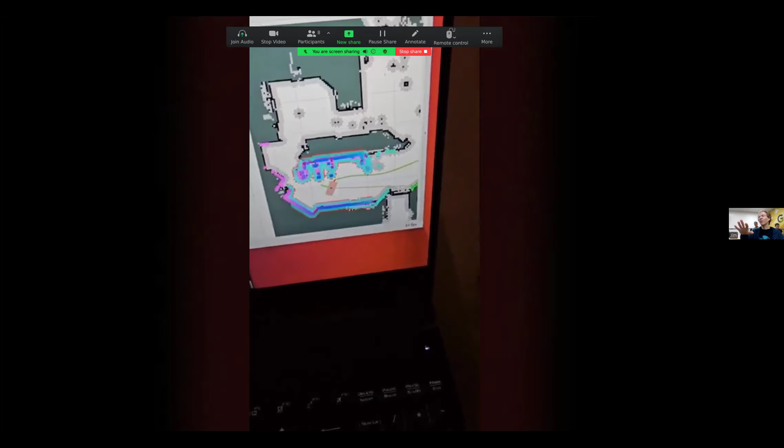This run shows the walking alongside the map viewing it on the computer, and I have another video that just shows the robot going. The challenge here was getting an Ackerman-based robot to navigate, which requires more agility and some backing up in a tight space—it's not as good as a differential steering robot like Orange, which has two wheels instead of Ackerman steering. But with persistence and patience adjusting the parameters, you can get it to work.

Now it's in the file. This is using what's called the MPPI controller. I can see you walking behind it. Yeah, you can see me walking. All right, now it's finishing.

So you have to select in ROS navigation a global planner and a local planner, and you have to choose from a list that are available or write your own controller. This one, called MPPI, will handle Ackerman-based steering, and that's the local one, and the global planner—I forget what I'm using, also one of the choices.

What's that, like SMAC or something? Yeah, the SMAC controller. Now this may not mean much to you right now, but you can choose these different controllers, and some of them are compatible with Ackerman-based robots, some of them are not. I had to choose a combination that worked best with this basic setup. Some of them are fairly bleeding edge, like the MPPI, and I had to recompile the MPPI controller because it kept crashing—the binary distribution.

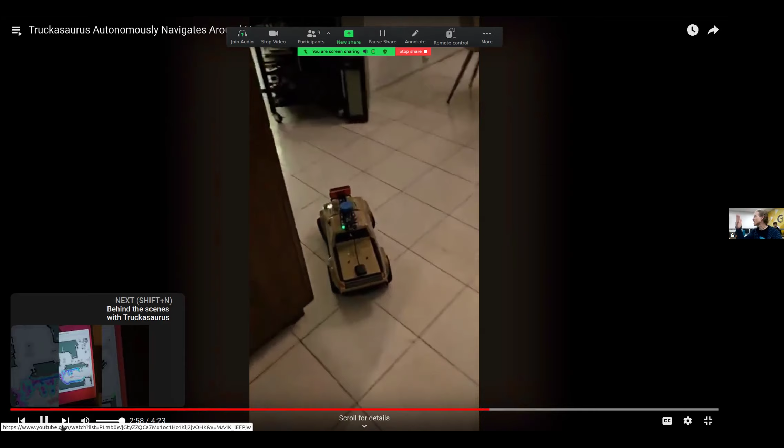This one, it kind of—again, I had to make the inflation so close that the error can send it into the wall, like Alan says. Well, this is obvious—this one actually, I've tightened it. Back up just a little bit. The problem, surprisingly, is it's done this twice now—like I ran it the other day, or yesterday, and it also clipped the wall.

I'm not really sure why—again, it's like the inflation is trying to keep it away, but there's some degree of error because my RPMs of the car, the steering, not everything is perfectly synced to the theory of what is sending the robot. So that's why you have inflation layers, because you need a buffer—you don't know exactly where the robot really is in real life at all times. But I don't want it to get stuck in this inflation hell where it just doesn't move anymore, so I have to cut it close, and sometimes this is going to happen. You have to tweak things to get more and more accurate.

My throttle model isn't perfect, so it doesn't go exactly at the RPM it's telling it to, and all sorts of things like that. I've tightened the padding, so it's not much padding because it's kind of tight in this house.

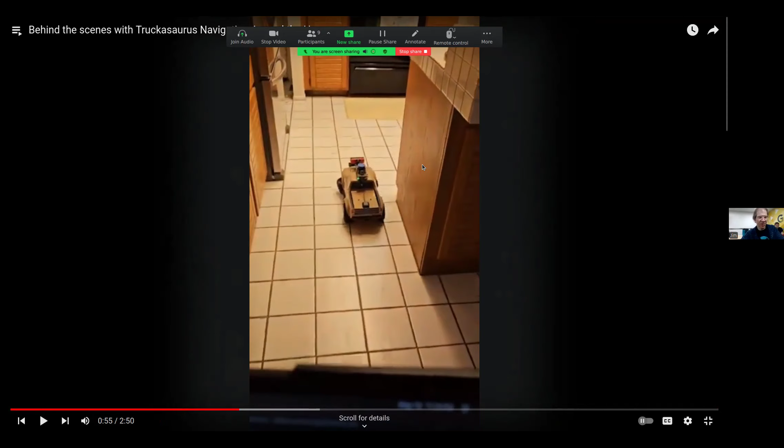That's where I got the... thank you. Looking good, that's awesome, Jim. I know a lot of work went into that. Yeah, thanks, that was a bit of effort.

I kind of went that route without giving up the idea of, or not pursuing the outdoor portion yet, because I just wanted to get all of this working and prove that it could use the mapper and navigate in a reasonable way around walls, hoping that the mapper would work outdoors to some degree. I'm finding now that maybe not. I'll just be turning off the LiDAR for outdoor use, unless I find otherwise, I'm still experimenting with it. But just using the odometry of the actual robot might be good and better than that LiDAR, because outdoors there isn't enough for it to bounce off of.

Well, this one is designed to work. It works okay outdoors without direct sunlight, but it's designed for reasonable outdoor use already. So it probably is, maybe it's modular.

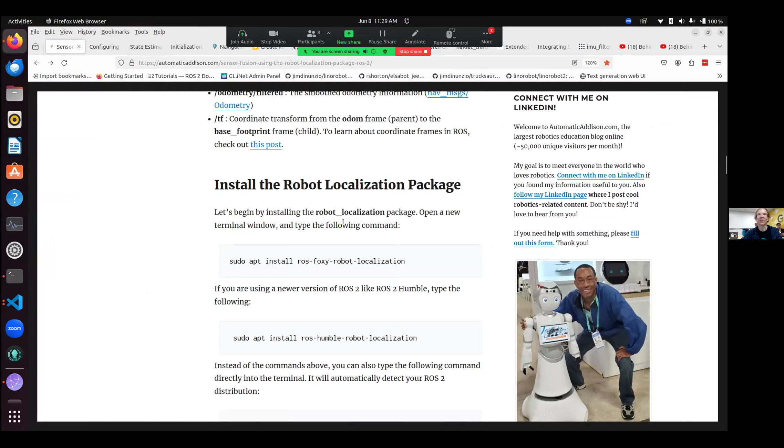But I'll see if I can approach him for a freebie for us. Yeah, so there's all these different ones, including tutorials involving GPS and navigation, step-by-step. Some of it might be older versions of ROS, but I definitely recommend that, and I'll paste this in the chat. There's just a bunch of different tutorials he has that are really good.

I don't know, where's the chat? Chat, here we go, paste it here. So let me show you. Truckasaurus rocks, thank you.

A lot of this gets kind of, there's a lot of detail to the navigation, but what I do have is some diagrams, let's see.

So this one is about integrating GPS data. Automatic Addison has a nice tutorial on that, how to use GPS with your robot. And I've been working on this a while now, over the past month, I guess.

That takes some time to go through, but what I want to show you is this nice diagram of how your robot has its different frames. It's got a local frame and it's going to have a global frame based on the map. With ROS, you have these different frames, and there's also a tutorial about those frames in Automatic Addison, another one of his tutorials.

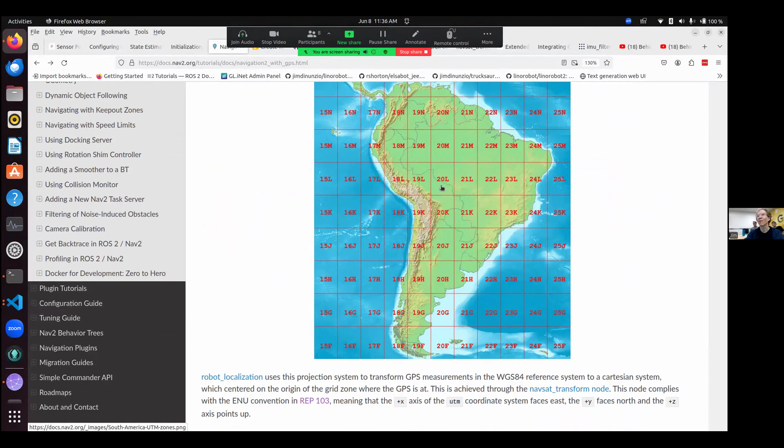This is some background on how the GPS system is used by your robot, via a projection plane on the surface of the Earth. Because the standard coordinates of GPS are like a radius to the center of the Earth, it's just not a practical way to use latitude and longitude or this other system. It's just not practical for a robot on the surface of the Earth that needs to go like 20 meters or 100 meters.

You want it to be on this projected plane, on a flat plane. And so that's what this conversion does. And then it will map that into your robot's local space.

And so this is a whole tutorial you can go through that will use Gazebo, and you don't need any robot or anything. You can run this tutorial and see how it works.

This is a fake generated GPS coordinates from a simulated sensor, but at a real location in the world on this racetrack. Right here, you can see this racetrack. And so I'm starting to use this system in the real world now, and that's how I'm trying to navigate the robot and be able to have it go from waypoint to waypoint in GPS coordinates.

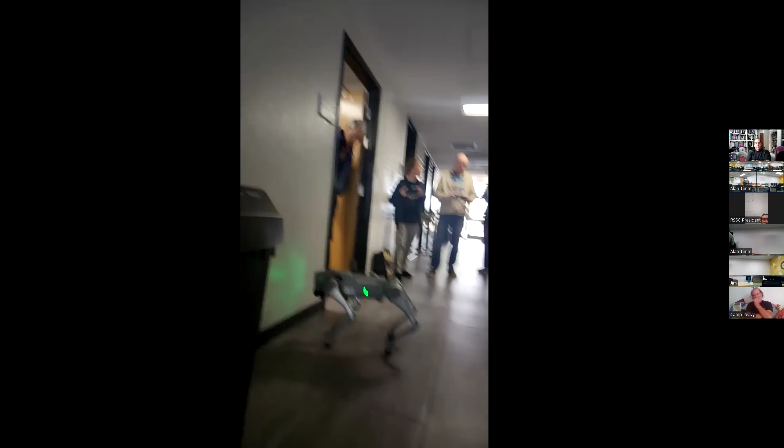There are a couple of different tricks built into it that are kind of fun. Shake hands. Whoa. That's where you put the hands on there, Alan. Oh.

Can you repeat that, Cam? I said there's where you put the hands on him. Oh, Cam is asking something. Go ahead, Cam. I'm saying you could put the hands on him when he's on his hind legs. Oh, right, like put your hands on him. Yeah, that would put your robot hands on him. That would look extra creepy.

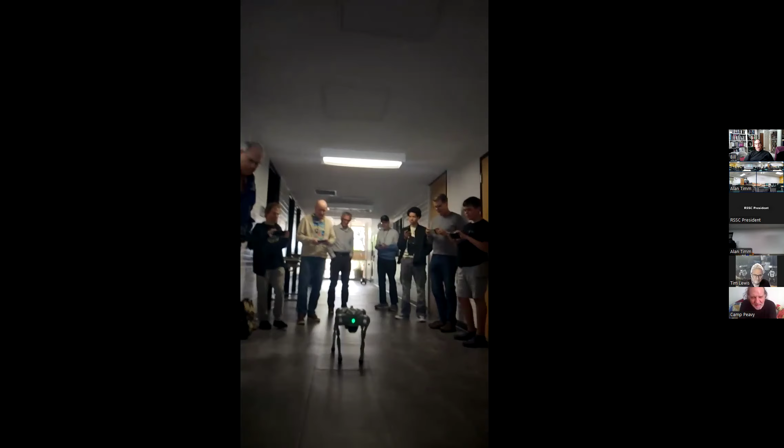Yeah, in the AI mode it is able to handstand, so it's halfway there. So it counts, and the robot platform itself is pretty performant. So you'd have to put the hands on the feet, right? Right. There's a couple. Can you do like a dance and rock, whatever stuff?

All right, so like those robots—actually, I'm sorry, I'm not putting it in there because I'm standing in front of it, but it shouldn't matter. There's a few little dance routines that it's supposed to do.

So what's exciting for me about this is now you have access to the full API, so you can write program and code that accesses the camera and the LiDAR. You don't even have to do a full reinforcement learning model—you can still control it at a high level and do interesting things. You can do that using the traditional sport mode API, the traditional controller, or with the new AI mode API. That's not available in the app because they have it paywalled, but if it's hacked, you can switch directly over to it.

So this is what's getting me excited about Magellan. I think it has really needed performance, definitely don't have to worry about traction. It's just a matter of writing the code to identify, localize, and touch a cone without knocking it over—you know, that little thing.

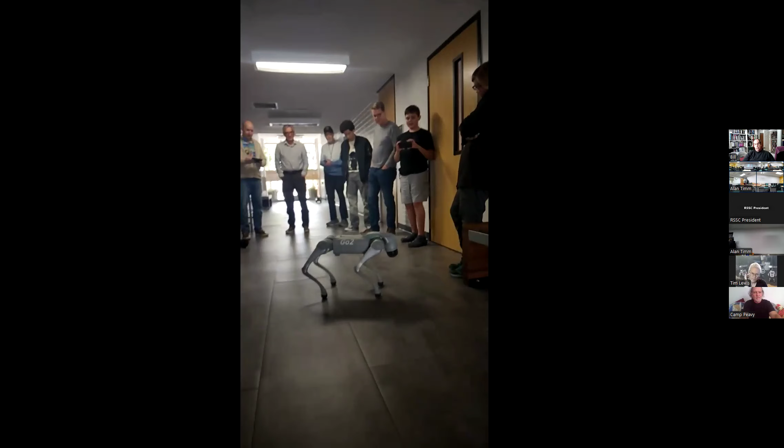Well, he can do that little hand thing to touch the cone. Yeah, you just touch it, reach on the paw. Yeah, that was actually my goal, is to kind of walk up to the cone, and then if I can get it in just the right position. Oh wait, no, wrong button. Follow the person—the right button. Stretching us back there. Yeah, there you go.

That is so cool. Yeah, my dog racing. I love that, I'll take that in my hand. Take that straight, everybody watch your back. Just walk into a dog and jump at it. That would just be so good. Oh, you can jump at me.

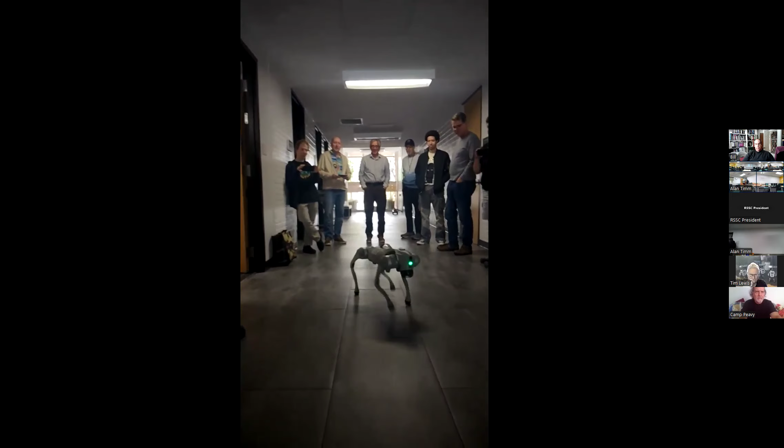I don't trust you not to do something dumb. I don't know if that's smart. But yeah, I'm happy to leave it on, and when we come back, grab a bike to come back. Anyone who wants to can drive it around. It's really cool, even before it does truly interesting things, it's a lot of fun. I'd say that was true.

Yeah, I ordered it from Unitree. I actually ordered it at the end of last year, after an epiphany that if I allow myself to get bored, interesting things will happen in my mind. So of course that means I purchased a dog. And it took so long to ship that I actually imagined, ordered, and built Alfie while I was waiting for it to get here. And then Alfie was done at the same time the robot got here, and I'm like, what should I work on first?

But yeah, ordered. Wow, that's really cool. I wish I was there. Yeah, man, you'll have to make it up at some point.

So there's a speaker, gonna get big sound. The air version doesn't come with the speaker, but you can package it. That's a demo or something. Yeah, that's what you meant. Yeah, for show and tell. And once you push it, should it be an indoor one? I mean, we can do the same thing with the phone. Sport mode, yeah, no, very easy to. What is the, yeah, the indoor one is.

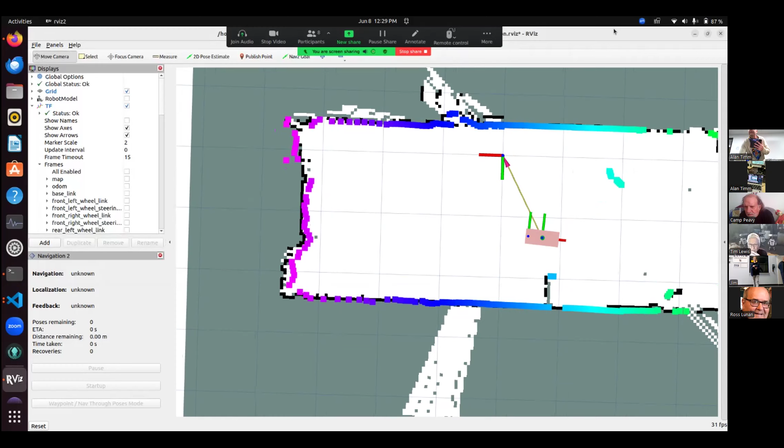Be right back, hold on Jim, one second. Tim, try that link again. It's going through for me. All right, I'll try it again. Where is me? Where is me? This is me. There we go, okay, all right.

Now we're cooking with gas. And the robot does not respond very well. Right, too many messages. Sneak in here for a second. It's the problem we have when RViz is on.

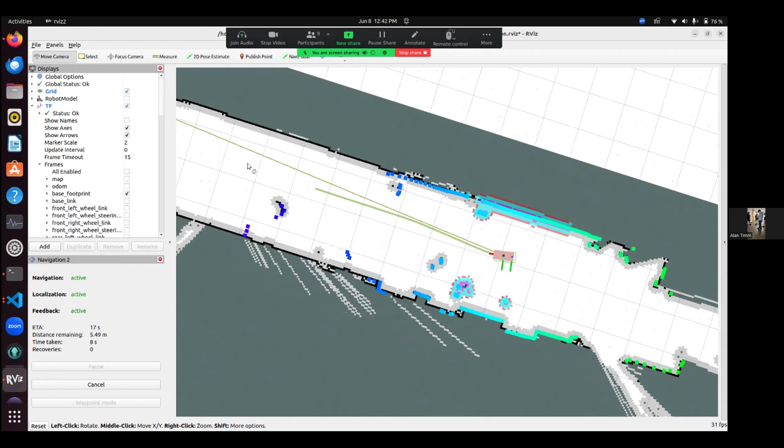And you know, you pop down the global... you're running a map frame, right? Yeah, this is a graphic. Okay, now I'm going to have it come back. See how it slows down there? And now it's kind of roughly navigating between people. Yeah, right. Oh, it's working better.

Beautiful, all right. Well, any questions? No, no man, looking good. Thank you. The next step is outdoors. And yeah...